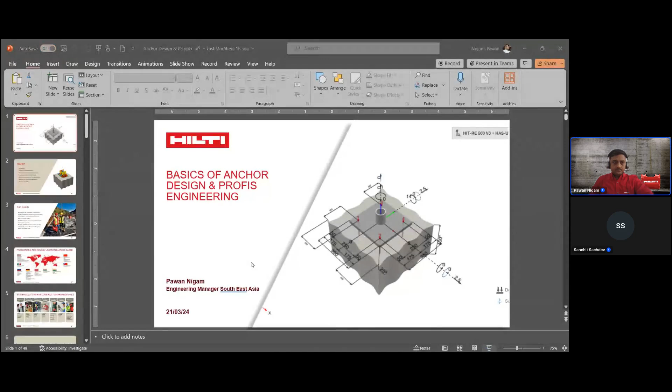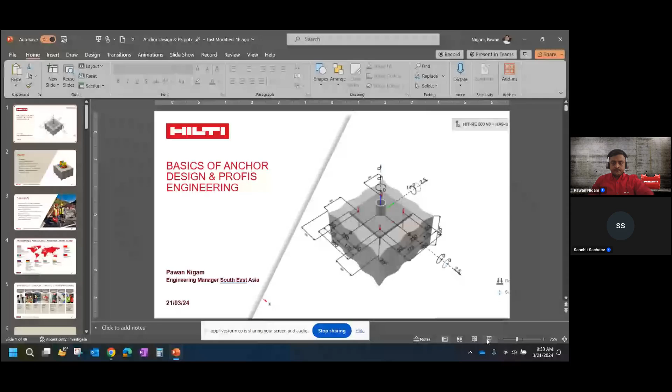There were some technical glitches with the screen sharing not showing in slideshow/presenter mode. After a few attempts to re-share the screen, it was resolved and confirmed working fine.

In today's webinar, we will cover a few basic aspects of anchoring application, how to select the right anchor, and the evaluation parameters for a post-installed anchor. We will talk about connection design using post-installed anchors, then move to the PROFIS Engineering page, showing how to gain software access with a small demonstration on selecting the right design guidelines. Finally, we will have a 10 minute question and answer slot at the end.

To begin with, let me introduce Hilti. We started in 1941 in a country known as the Principality of Liechtenstein, a very small country situated in Europe. Globally, we do almost 6 billion in sales with a global workforce of around 32,000 people. We are present in more than 120 countries, and it's a family-owned business.

In order to make sure that whatever R&D we do, we are able to give that benefit directly to customers. Talking about manufacturing locations, we are well spread across the globe, with different manufacturing facilities and R&D centers situated wherever we are present.

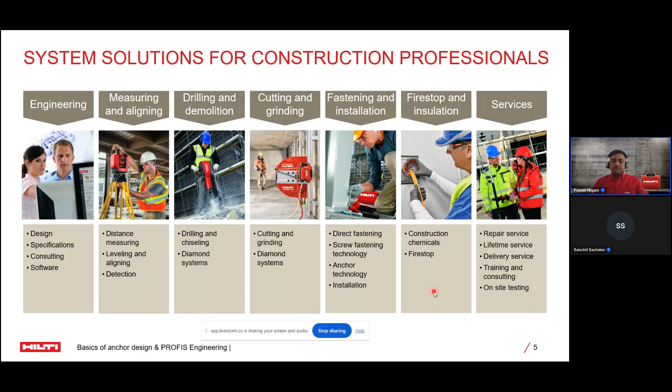We also have our strong footprint in passive fire protection systems. In today's world, it's very important to save buildings from fire hazards, so we have a portfolio which helps make the building properly compartmented, ensuring fire stays in the room of origin and does not spread from one room to another.

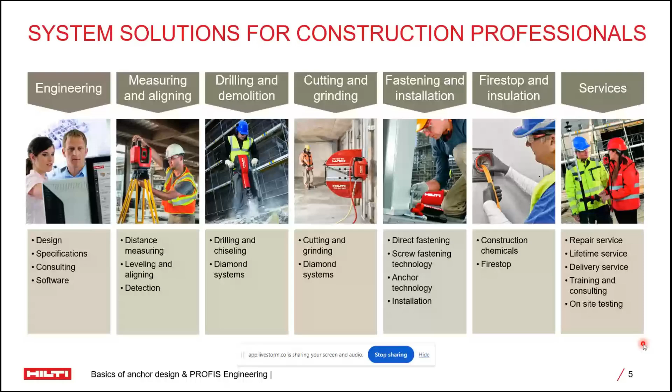Talking about the services, we provide repair services for all the tools we sell in the market. We give lifetime warranty on manufacturing defects, delivery services, and we also provide training and consultancy at the job site on how to use our product in an effective and most productive way.

With this, let's now jump to the topic of discussion today, which is steel to concrete connection. There are various methods through which you can fix steel base plates with existing concrete members, but today we will only focus on post-install mechanical anchors and post-install chemical anchors, because Hilti is widely known for these post-install anchors.

Talking about post-install anchors, the advantage of using this is it gives you flexibility in installing the anchors anywhere in the concrete surface based on the design need of a building. You don't have to worry about misplacement of bolts or the casting plate—it's very precise. The installation is also very fast; within an hour or so you can install your base plate and erect your structure.

If you are using a mechanical anchor, it is almost instant. The technology is also well established in the market, and we have a lot of references, approvals, and certificates to establish this particular technology in the market.

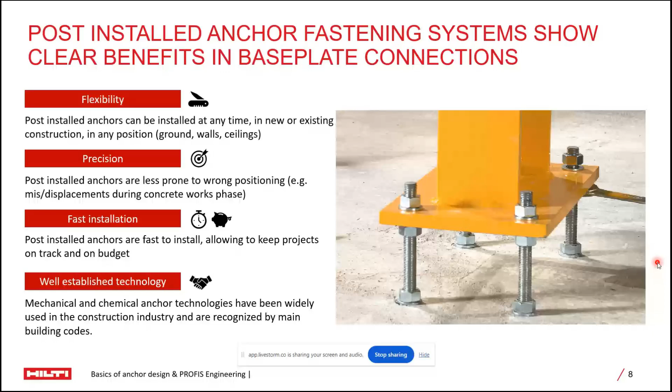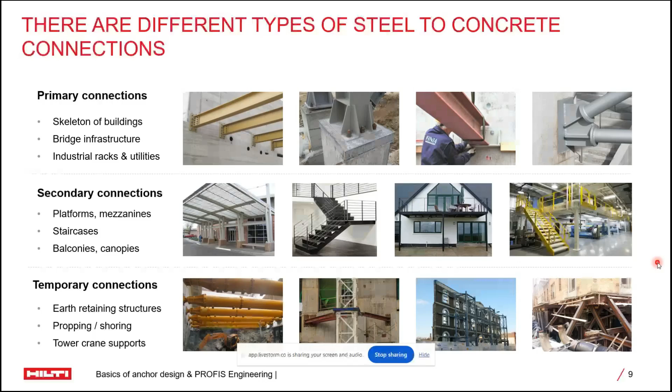Now, talking about the different connections which you can find at the job site, we can categorize into three buckets. I'm sorry for this. Okay, we can categorize into... Just hold on, Sanchit, let me mute this, otherwise it will keep on disturbing us.

Perfect, so make it long. Let me go back. Extremely sorry for this, I had to mute it, otherwise it will disturb us again and again. I hope the screen is visible again, Sanchit. It's good, yeah, it's visible.

It's visible, okay. So we can categorize these connections into three different types: primary, secondary, and temporary. Based on the criticality of the application, we segregate these connections based on design need. Primary connections are very critical because they take the entire structural load and transfer it to the concrete footing, D walls, or retaining walls. It's very important to design these connections because failure can lead to catastrophic effects on the safety of the structure and the people using that building.

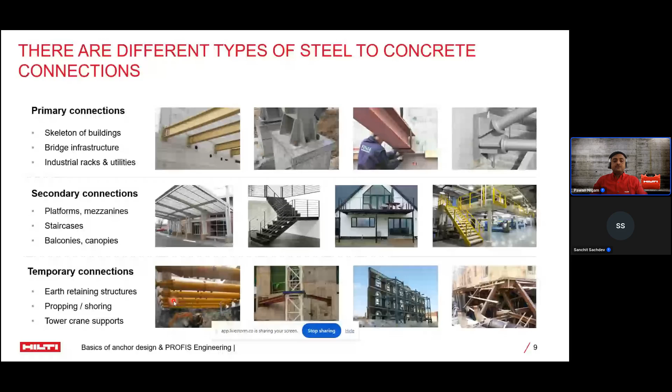So that's the reason—if you categorize all these connections, there are certain connections which are high on safety, and it is very important to design those, such as main steel beams, machine foundations, canopies, and non-structural elements like facade, stone cladding, or MEP supports hanged from the slab.

They are also not part of your main structure, but they are critical because if they fail, they can hamper the safety of the people occupying that particular building. So these are also very important to design.

Now when we talk about design, what are the steps involved in designing a post-install connection? The first step is the selection of the right product, meaning the product should have the qualification to be used as a post-installed anchor. The second step is design based on the guidelines available in the market, which take references from testing data.

The third step, which is also very critical, is the application or execution at the job site. Because if you select the right product and do the right design, but you are not installing the product in the right way, then all your efforts will go in vain.

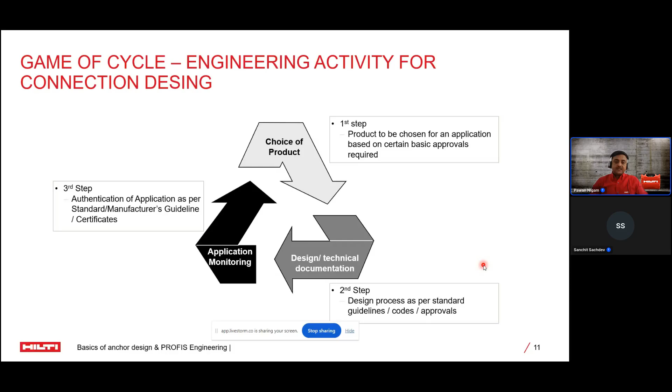So let's start with step one, and let's see why it is important for any product to qualify and get the qualification certification. This is also based on the design method you want to use. If you want to use European guidelines for designing the anchor, then EAD or European Assessment Document are the relevant documents for testing the product.

But on the other hand, if you are using ACI, then for testing the product, ACI 355.2 or 355.4 are the right testing criteria for the product.

So based on the nature of the product, the testing guidelines differ. For mechanical and chemical anchor, we have EAD 330499 - previously it used to be ETAG 001. And if you talk about American standard, we have ACI 355.2 and 355.4 for mechanical and chemical anchor respectively.

On the other hand, if you talk about rebar, then EAD 330087 is the qualifying criteria, and ICC AC 308 is the qualifying criteria if you talk about ACI standard.

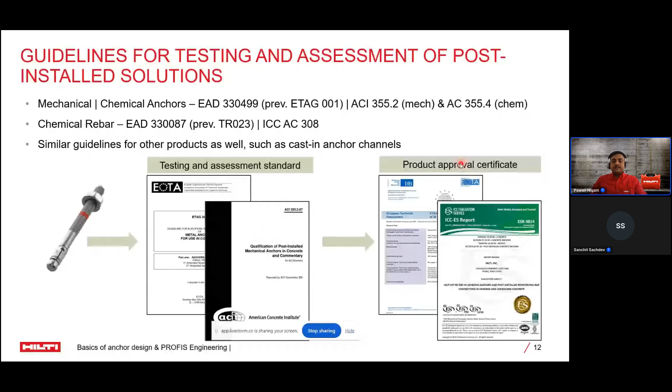Similar guidelines are also available for other cast-in products, but today we are not talking about cast-in, so we will not focus on that. So what happens is your product goes to testing based on these testing assessment standards, and then the product gets the approval to be used for post-install connection.

Now, why is testing important? The main reason is that for all products - mechanical anchor, chemical anchor - the bond strength or the friction capacity of the anchor cannot be calculated based on formulas. You need testing to find out the actual capacity of the anchor in the actual working environment.

For mechanical anchor, at how much embedment depth can this anchor give a certain load? What should be the expansion of the sleeve? This we cannot measure based on some scientific formula. We need to do the testing to find out the actual capacity and behavior of this anchor.

Similar things happen with chemical anchors. The bond strength, or bond stresses rather, which you want to find out, can only be determined by doing the testing and assessment on the product.

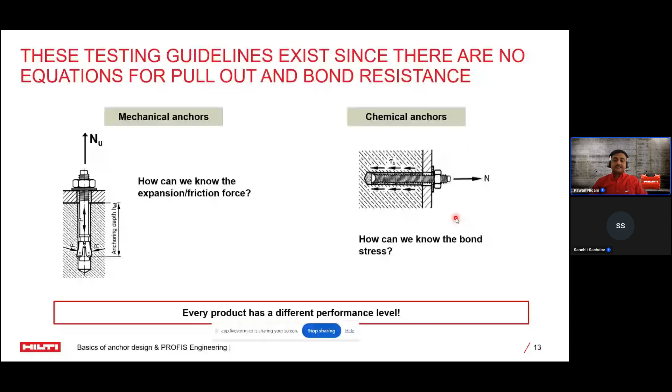Now, apart from these two, the assessment document also covers installation conditions, such as the spacing between two anchors, edge distance from the anchors, the thickness of the base material, grade of the base material, and the oldness and newness of the particular base material.

Apart from that, they also talk about installation. Let's say if you are using a new drill bit - what will happen? Because the new drill bit will give you a bigger borehole diameter, whereas the old drill bit will give you a smaller borehole diameter. So what will be the impact? That variable effect is also considered and tested in these test documents.

Similarly, for mechanical anchors, what will happen if you over-torque it? What will happen if you under-torque it? Then what will happen if the anchor is installed in an area where a crack is already there? These are the conditions these assessment documents talk about, and the testing is done based on these criteria. Apart from that, there are other criteria also, such as seismic, fatigue, and fire conditions that these documents also test.

Someone can say that I can do the pull-out test at the job site, and then I can see whether the product is qualifying or not. So my suggestion is, yes, you can do the pull-out test at the job site.

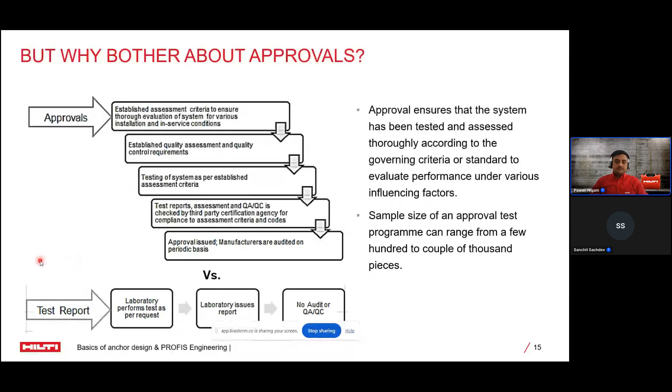Now apart from that, what other things are covered? As I said, it talks about the admissible service condition - the expected service condition of an anchor when it is subject to single anchor in tension or shear, or anchor group, and it talks about the minimum edge and spacing. It also talks about the suitability test, that means evaluation of the anchor in extreme conditions - for example, single anchor subjected to high strength concrete in a hammer drilled hole with minimum tolerance range.

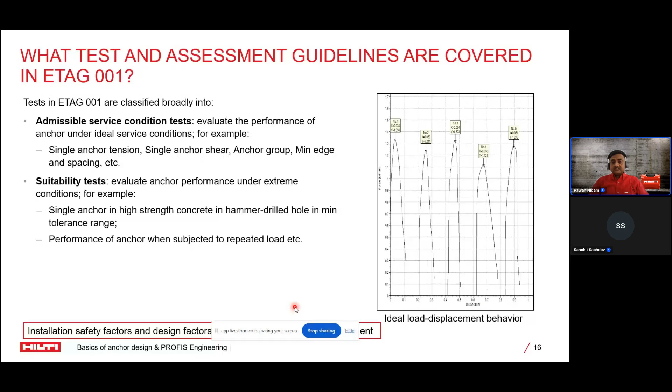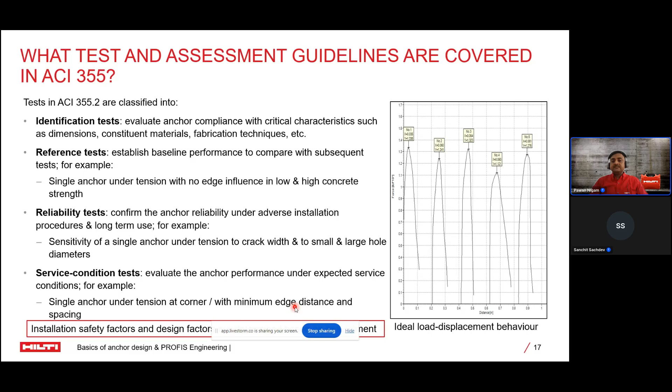For example, performance of anchor when subjected to repeated loads - those things we can only do in laboratories, that cannot be done at the job site. Similarly, if you talk about ACI, similar kinds of tests are done on ACI standards as well. They do the identification test, reference test, reliability and service condition test to give you the certificate for that particular product.

And then apart from that, there are certain other documents also which are many times very important when you talk about the entire service life of that particular connection. We are not designing the connection for let's say 1 day or 2 days - many times these connections last for 50 years and more than that. During that entire lifespan, the anchors are subjected to different environmental conditions like corrosion.

For certain projects, you might need LEED certification also - it should not have volatile content. Then the product should also be tested for long term aging. It should be tested for water tightness - in case of chemical anchor, it becomes very important that your product should not allow water seepage inside the concrete through the product itself, so that testing is also done. Then fire resistance, product certification, chemical resistance, electrical conductivity - all these tests are also needed for a product to get qualification to be used as a safe alternative to a cast-in anchor.

Now, why is design important? We are now moving to the second step of the complete process - when we talk about design. Imagine a situation where there is a connection to be done at the job site, and the engineer has just simply made this kind of sketch on the drawing, mentioning only 'anchor fastener'.

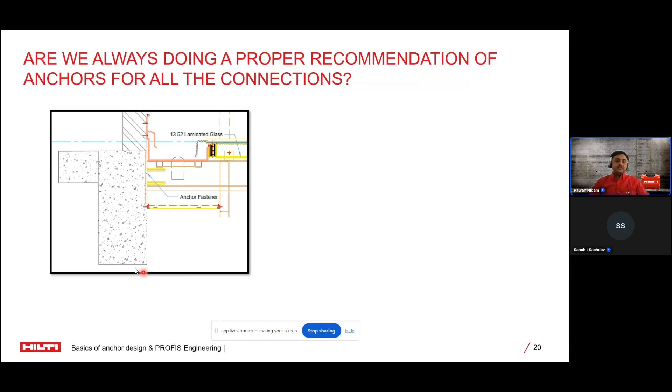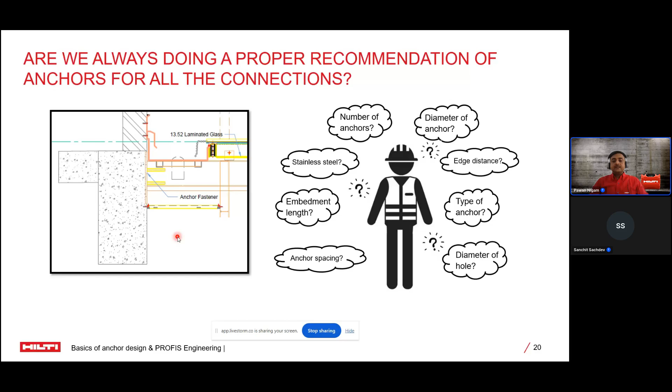What will happen if this kind of drawing goes to the job site? The labor or contractor working at the job site doesn't understand these things - they don't know what will be the number of anchors, the diameter, the edge distance, the grade of steel of the anchor, the embedment depth, whether they have to use chemical anchor or mechanical anchor, the spacing, the diameter of the drill hole. All these questions will be in the mind of the contractor, but there is no answer to it.

Why? Because in the drawing there is nothing mentioned - they have just mentioned 'anchor fastener'.

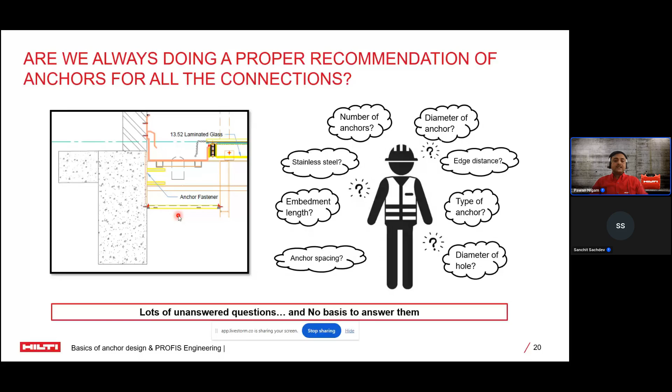From a designer's point of view, we have given the recommendation, but this recommendation is not useful for the contractor because there are so many questions which are unanswered. So what will happen if these kind of connections are left to the will of the contractor? These kind of connections will fail eventually. It might not fail in 3-4 years, 5 years, it might fail after 5 years also. And we have a lot of such examples where the connection has actually failed after 3-4 years or 5 years of the service of the anchor.

This is also a video where the connection is subjected to wind load, and at the time of designing we have not considered that thing. So what happened? Let me show you a video for that.

So you can see... yeah.

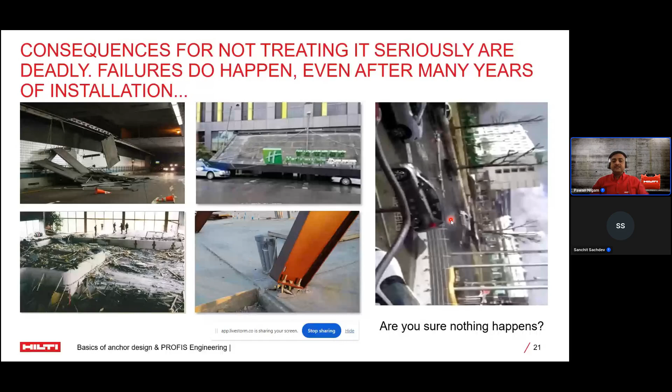I'm sorry to share this video. It might be disturbing for some of us, but then it was important to show the importance of these connections. That's why I have actually shown this video.

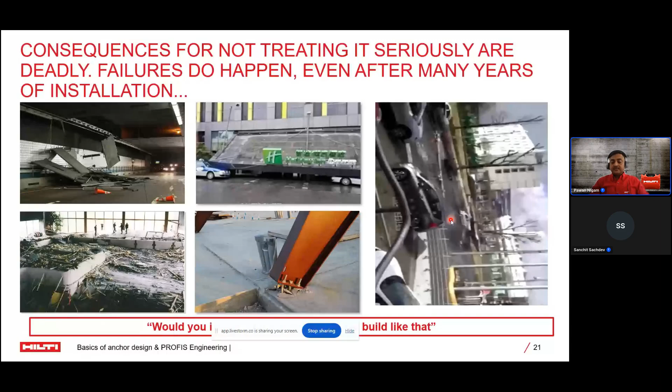So my question is then, would you like to live in these kind of buildings, or would you like to invest your money in these kind of projects where the connections are not designed as per the design guidelines? So my answer technically is no. So what are the current methods people normally use?

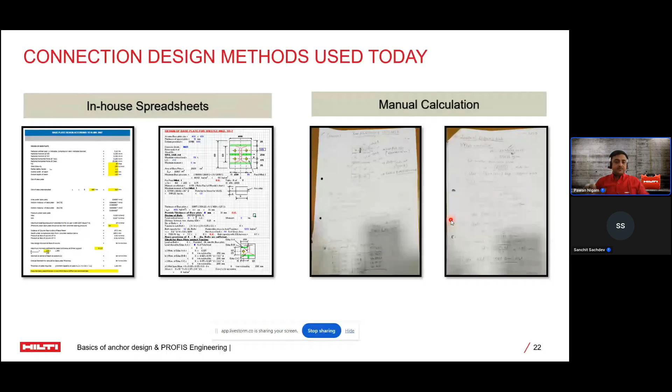In my experience, a lot of time I have seen that people are using these kind of Excel sheets or manual calculation to find out the diameter and the number of anchors. But what happens many times also is that people use thumb rules. Let's say, install 10D. If the plate thickness is 10 mm, let's install a 16 mm anchor. These kind of thumb rules are also many times people use.

But then what is the disadvantage of using these things? There is no consistency when you talk about these design methods, because in the same organization there are different engineers. If they are using manual calculation and they miss one small critical step, then the entire calculation might change. So it's not simple to design manually, and it's very time consuming. And if you have to get it cross-checked with your peer consultant, then also it's very unreliable.

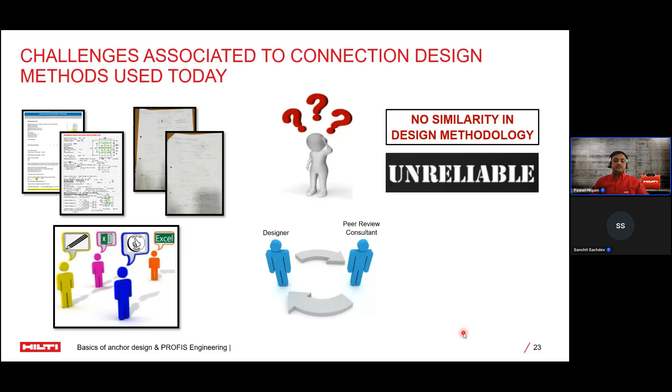Many a times the anchors are underutilized, or it can be overutilized also sometimes. Then we have to do the rework if there is a design change, and it becomes very time consuming to do the rework on these kind of cases.

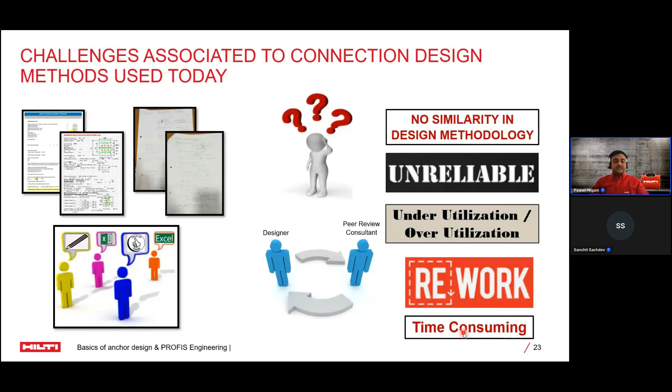So how can we ensure that the connection which we have designed is safe, and we can also easily verify that? How can we do that? So before going to the actual software, let me also tell you what all are the conditions which we need to keep in mind while selecting a product and while designing that connection.

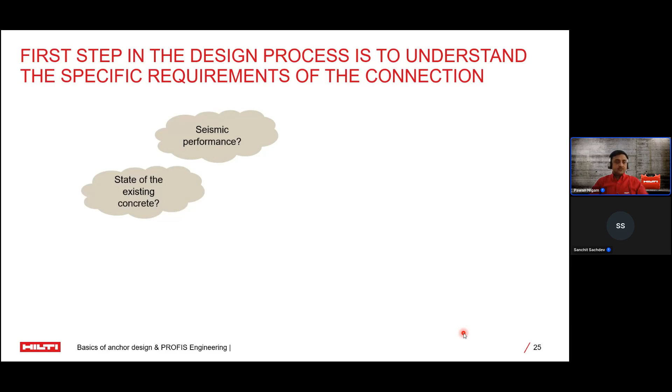So first of all, we need to see whether the connection needs a seismic performance, whether what is the state of the existing concrete - is it old concrete, new concrete, or what is the grade of the existing concrete? Do we need corrosion protection? What is the service life requirement of that connection - is it 10 years, 20 years, 50 years, or let's say in some cases in infra projects normally it is more than 100 years also.

And also, do we need fire rating? In today's environment, fire is also very unpredictable. And we have seen many instances where fire has occurred and the connection has also failed because the anchors which we have used are not tested for fire. The main structure we design with all the care, but when you talk about these secondary connections or the steel connection, there we sometimes unknowingly ignore these facts.

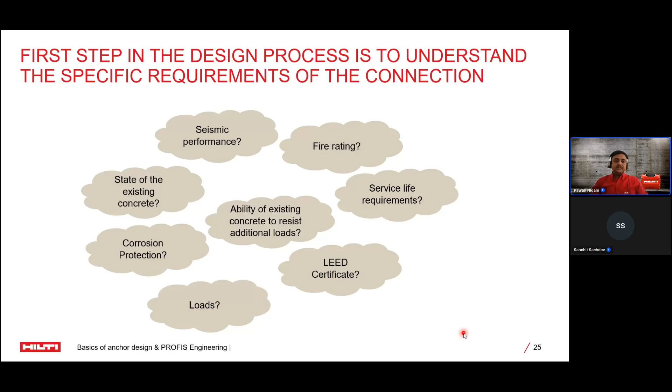Then LEED certification might be also useful for some of the building, because again, in today's scenario people are moving towards green building. And then we also talk about the loads - whether it is subjected to tension, shear, bending moment, or torsion, what kind of loads are coming. And we also need to know whether the existing concrete on which we are fixing these anchors is actually able to take the load or not.

After determining all these conditions, then we have to select the right design guidelines. So in some countries people follow European standard, some countries people follow ACI, and in many countries they have their own standards also. So it's very important to select the right design standard before actually going to the design of the product itself. And apart from that, we also have some international guidelines which talk about dynamic loading, seismic, fatigue, and shock.

So these are the guidelines available for designing the connections in those conditions. When we design the anchor, there are certain things we can get as an output from the design. First is the type of anchor, whether we need chemical or mechanical, what is the diameter of the anchor, what is the embedment depth, how many anchors we need, and the layout of the anchor. Apart from that, we can also check for fire and corrosion.

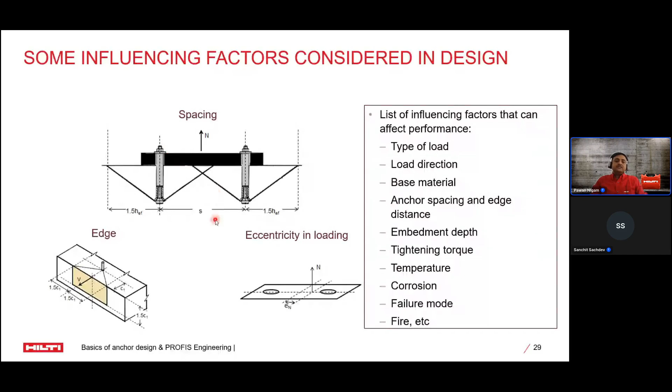Now there are certain factors which influence the overall capacity of the particular connection. To name a few, spacing is one of the biggest criteria, then edge distance, the grade of the concrete - these are the main criteria that influence the overall capacity of the connection largely. Apart from that, obviously torquing of the anchor, temperature, corrosion, failure - all these are also conditions which affect overall performance. So we need to consider these things while designing.

So when we design the anchor, we actually break down the entire connection into two. We resolve the forces into tension and shear. Then for tension we check the steel, we check concrete for three types of failure, and we find out the least design resistance. We do a similar thing for shear, and then we check whether this connection, if both tension and shear are acting together, what will happen to that connection. So we do the check for combination as well.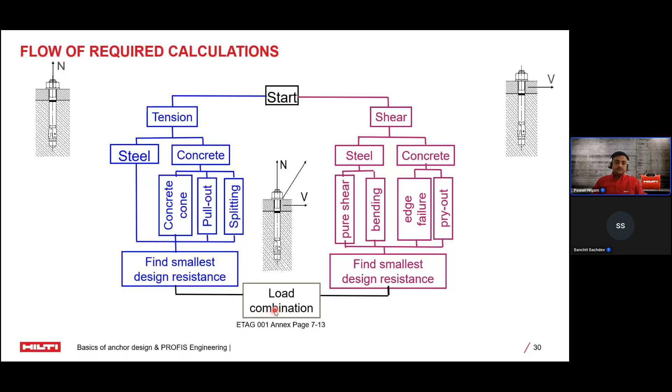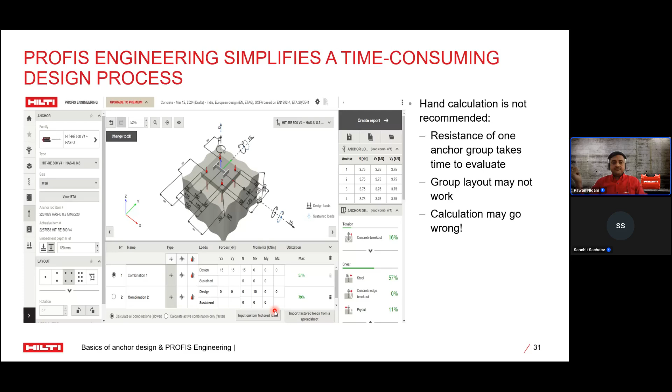So all these conditions, if you go and do the hand calculation, it's very time consuming, and many a times it can lead to errors also, because if you miss one small safety factor, the entire design will get impacted because of that.

So with this, let me now take you to PROFIS Engineering. Before I go there, let me also show you how to gain access to the software.

So this is the web page address. I request you not to Google it, just put this in the browser, which is profisengineering.hilti.com. The moment you plug it in, this kind of web page will get displayed on your screen. You click on register now. A small screen will pop up asking for your working email ID. You can create any password of your choice - whatever password you want to keep, you can keep it.

Then in the country of residence, I'll request you to select Myanmar, because if you are joining from, let's say, Myanmar or Cambodia, this is required to be Myanmar only, since we have not launched the software as of now in Cambodia. So if you select Cambodia, you might not get access to the software. For people joining from Maldives and Brunei - for Maldives, you can select Sri Lanka as your nearest country, and for Brunei, again, you have to use Myanmar to gain access. If you select any other country, you might not get access to PROFIS Engineering. So my humble request, while registering, please make sure of it.

Then once you are done with that, there is an email which will go to your working email address with a 6-digit one-time password. You put in that one-time password, and then you are good to go. The page will redirect you to this particular page where you can access all these things. Now let me take you to the PROFIS Engineering web page.

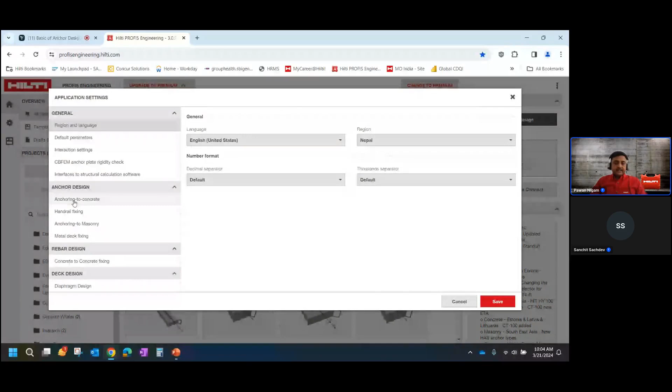Now, before you go into that, if you want to change the design guideline, right now you can see by default it is EN. If you want to change the design guidelines, just go to settings, and there you have to find this anchoring to concrete section. Over here, you can select the design guidelines which you want to use. By default, there are certain guidelines which are placed in the software.

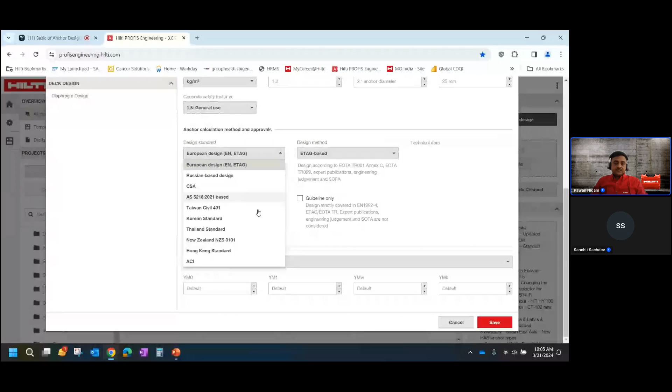So you have ACI, and apart from ACI, we have some other local guidelines which some countries follow - we have Russian, Thai, New Zealand, Hong Kong. If your project happens to be in any of these countries, you can select these standards as well. Once you are done with that, you just click on save, and we are good to go.

So you just click on anchoring to concrete, and this is the template which you will see by default. The first step is to define the boundary condition of the concrete.

That means you have to define what is the surface on which you are mounting this base plate - is it a beam, column, slab? For example, let me consider a base plate on top of a slab. If I have to mount that, and the connection is actually in the center of the slab, so I have enough edge distance around it.

So what I can do is go on this corner - you can see this red color indication. You do the double click, and the concrete will become infinite on all four edges. If you have to go back, you again go here and double click, and you will get the edges again. And then from here you can define the edge distance as well.

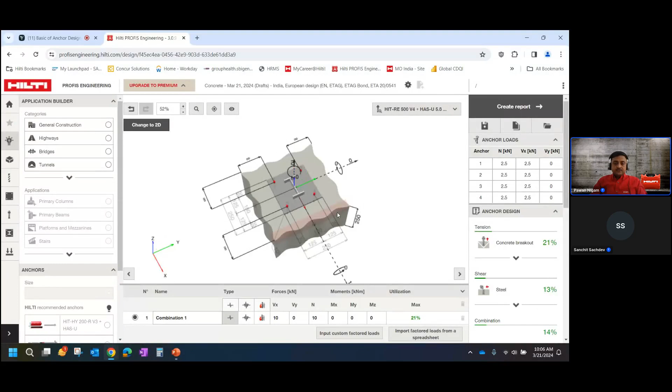Once you are done with that, then you can define the thickness. Let's say my slab is 200 mm thick, so I'll put 200.

Then the next step is to define the loads - how much load are acting on the base plate. Let's say I have 10 kilonewton tension, 10 kilonewton shear in x direction, and similarly I have in y direction also. There are two ways to put the loads.

First, you can click directly over here and put it. Second, you can put the loads from this tab down below. And if you have multiple load combinations, then also you can add that combination.

Let's say I input a custom load - another tab will open. Let's say in this case I have 10 kilonewton bending moment, so I'll put 10 kilonewton. I'll select add. Right, so you see now there are two load combinations which the software will calculate.

Similarly, if you have more than two, you can actually add those combinations manually from here, or you can add all the load combinations from the spreadsheet. You can copy it and paste it over here.

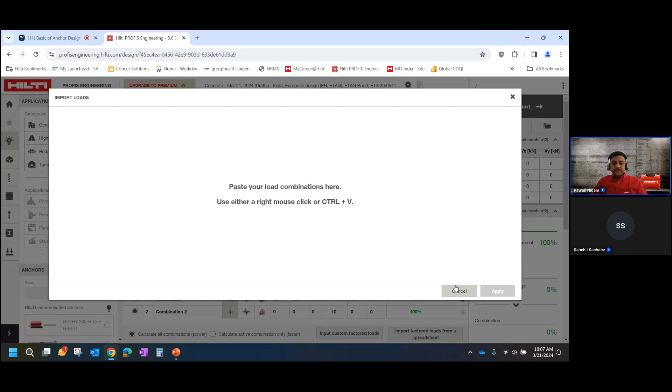So all the combinations will get automatically embedded in the software, and the software will check for all the load combinations, and it will give you the result for the decisive combination. Let's say in combination 1 it is only getting utilized 18%, but in combination 2 the connection is getting utilized by 100%. That is how you will get the result.

The next step is you have to define the grade of the concrete also. On the left hand side there is a tab for base material. You go on base material, select whether the concrete is cracked or uncracked, and then here you can define the grade of the existing concrete.

Now for example, you have customized the grade at your job site and you don't find it pre-fitted here, then you just select custom. These two tabs will open up for you.

If you want to put the cylindrical strength, you can put cylindrical strength. If you want to put cubical, you can put cubical as well. Apart from that, you can also put the short-term and long-term temperature range through which you think the connection can be subjected. Based on that, the product selection will happen automatically.

Then from this area also, you can define the thickness, edges, or everything from here as well. So there are two ways. First is directly from the screen, second is from this tab.

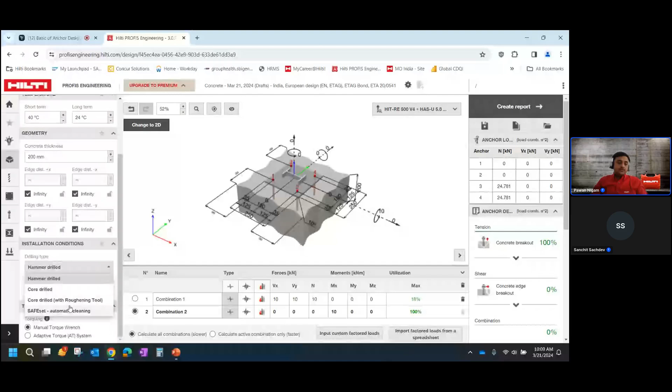Apart from that, you can also define the installation condition, whether you are drilling hammer with the hammer drill bit, or you are drilling a core drilled hole, or you are drilling core drilling with roughening, or you are drilling a SafeSet. So the drilling method you define here.

Then you define the hole type, whether it is dry, water saturated, water filled, or submerged. Based on that, the product will automatically change again.

Then in case of mechanical anchor, there are torquing methods also available. If you are doing manual torquing, you can select this. If you are using Hilti's automatic torquing tool, then you can select Adaptive Torque System from this particular tab.

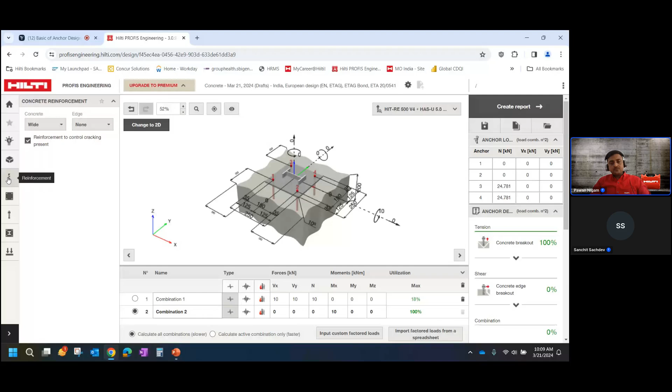Once you are done with this, then the second tab is the reinforcement. Here, if you want to put the reinforcement also, which you should, you can go to this tab and you can put the reinforcement layout also.

But for that, you need to change the design guidelines. So for doing that, you just go to this load section. Here, by default, it is ETAG based. From here, you can select EN1992 Part 4, which is the latest guideline, which gives us the flexibility to utilize the existing reinforcement also.

You select this, again go back to here, and from here you can define the diameter and the spacing and all those things in the existing concrete member. Let's say it is 10 mm, 12 mm, what is the strength of steel you have used, what is the spacing, and how much the rebar is utilized currently. So bottom layer, top layer, everything you can define from here.

Let me go back for simplicity. Let me not use this.

Apart from that, then you can go to the anchor plate. If you want to change the dimension of the base plate, then you can go in this section. You have by default rectangle plate, circular, diamond shape, all these are by default located here. But if you want the base plate to be of your own choice, then you can go here.

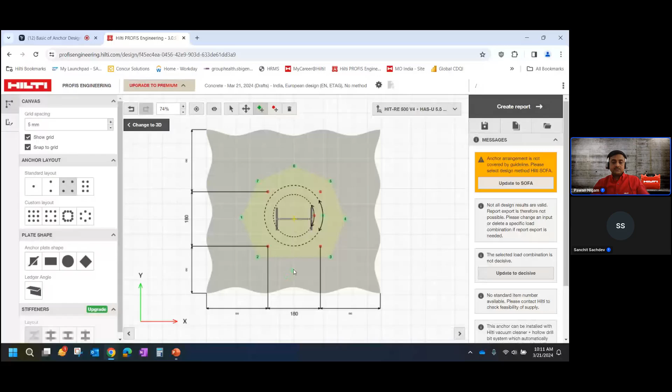You just simply click on add node, and wherever you want to put a node, you can just simply put the nodes. Let's say I want to put it in a hexagonal shape. So this is how you can change the orientation of the base plate as well.

And if you want to go back, you just have to select this undo button, and the plate will go back to the original shape.

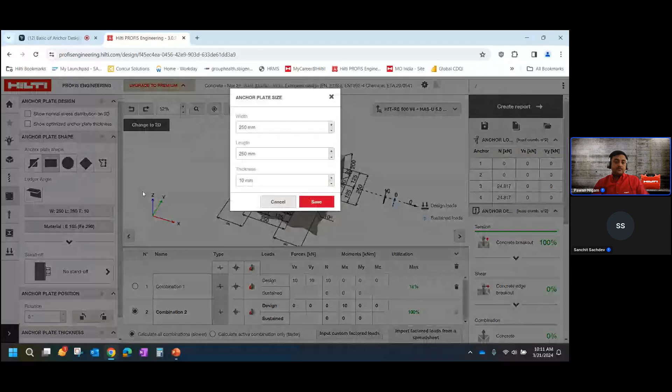From here, you can also define the dimension, length, breadth, and thickness of the base plate, and you can define it directly on the display as well. Let's say I want to keep it 200 by 200, so I'll simply put 200 by 200 here. And then anchor spacing also you can define directly from here, say 150 by 150.

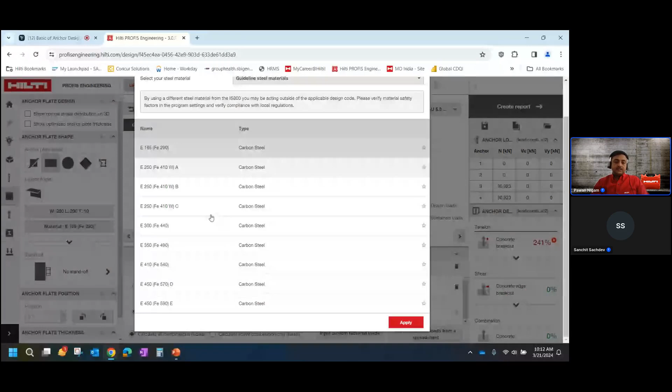And then material also, if you want to define the material of the base plate, you can go to this section. There are pre-treated values, and if you want to customize it, just go to custom. All these sections will open up for you. You put the values based on the material which you are using, and just click on apply.

Apart from that, in certain cases, you might also need to create a standoff between the base plate and the concrete member. So what you can do is you can just click on this. There are pre-fed standoff combinations from which you can select.

Let's say you are using a combination with grout. So you just select this, and from here you can define the thickness of the grouting material, and you can also define the compressive strength of the grouting material.

So let me go back. Then this is the section from where you can select the anchor.

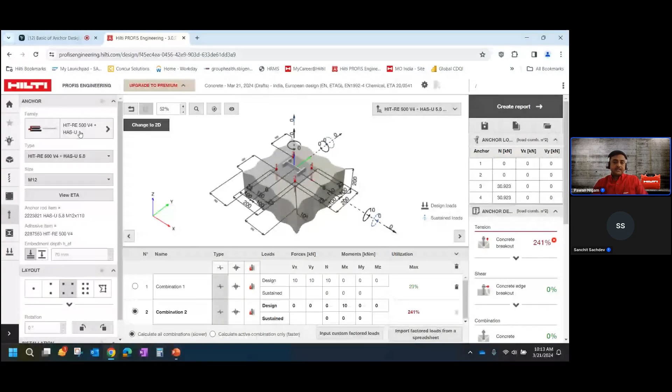By default it is selecting the chemical anchor, but if you want to select the mechanical anchor, you go to this section, and from here you can see which anchors are already available in the portfolio. Let's say we have HST3 mechanical anchor, I'll select this. After that, you can define the profile also on the base plate.

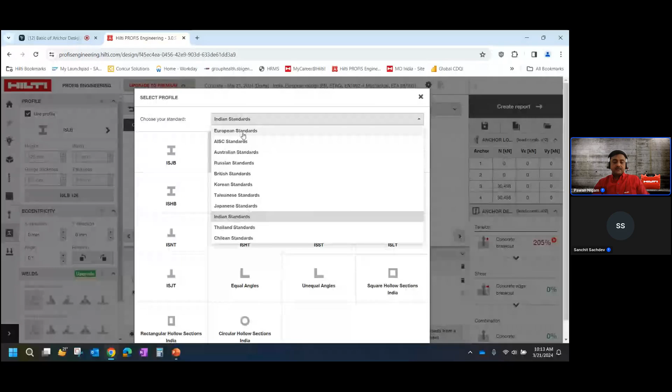This is the section where you can see the default profile, and if you want to change the design guideline of the profile, you can select anything from here. Let's say European, and I have rectangle hollow section. The profile will change like this, and from here you can change the dimension. Let's say 76, then the profile size will automatically change. And if I have my own custom profile, I'll go back, select custom, and this section will open up so I can put whatever value I want.

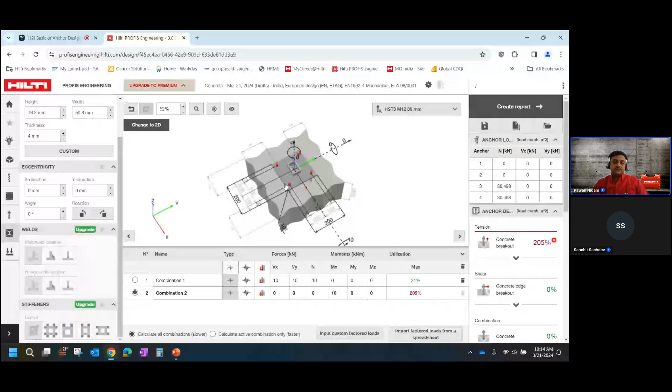This is the section from where you can define the eccentricity of the profile, which is also very important when designing a connection, because if your profile is not at the center of the base plate and is towards the edge, the load distribution on the anchor will change significantly. So it's very important to place the profile exactly where you want it to be, so that the distribution of forces can also be calculated in a similar fashion.

Then the last tab is the load tab, where you can select whether you want to design the connection for static, seismic, fatigue, or fire. These are the things you can select from here, and then you can do the design calculation. This is the tab where you can do the base plate rigidity check also.

So there are three things. By default, the software considers that your base plate is rigid. The second option is to check the rigidity of the base plate—the software can give you an overall idea whether the base plate you've selected is sufficient enough to transfer the load safely or not. The third option is CBFEM, which is not available as of now in our part of the world. Once it is active, I can come back again and explain it to you.

Once you are done with this, on the right hand side you can see the design optimization of your anchor. This particular connection is getting utilized by 205% in concrete breakout and pullout, which means your connection will fail. That's how you can define it.

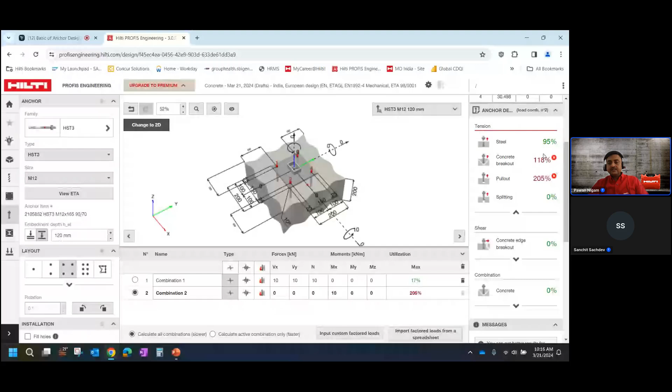So what you can do is, since concrete breakout is happening, there are two things we can do: either increase the spacing or increase the embedment depth. Let's go back here—let me check whether I can increase the embedment depth. I can go maximum up to 120 mm, but there is still concrete breakout failure happening. So what I can do is increase the spacing a little bit. Let's say I'll go back to 200, and this was 180.

Similarly, I can go back here to 250, and this also 180. My design is still not qualifying. So what I can do is try to increase the diameter. Let's say 16—also it is not passing.

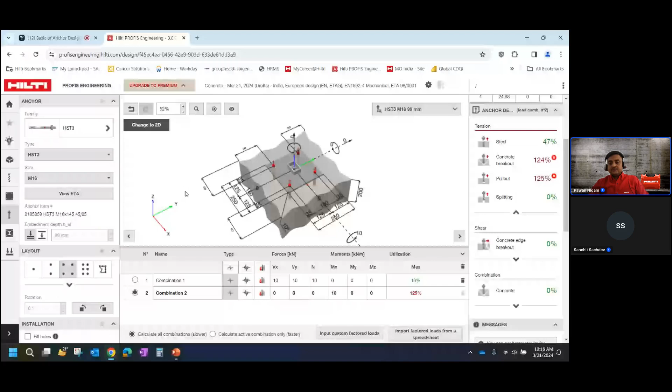So let me check whether this design gets qualified with a chemical anchor instead. I'll go back and select 16 mm. Yes, my anchor design is getting qualified now, and I am getting 100% utilization in concrete breakout.

Let me see if I can optimize it further. So let me select 12 mm—yes, I can still optimize it. Now my steel of the anchor is getting utilized by almost 89%, and the concrete breakout is at 100%. That's how you can optimize the overall design, and you can see the decisive factor is the bending moment. The normal tension shear is only getting utilized by 18%, but the decisive combination for us is the bending moment which is active.

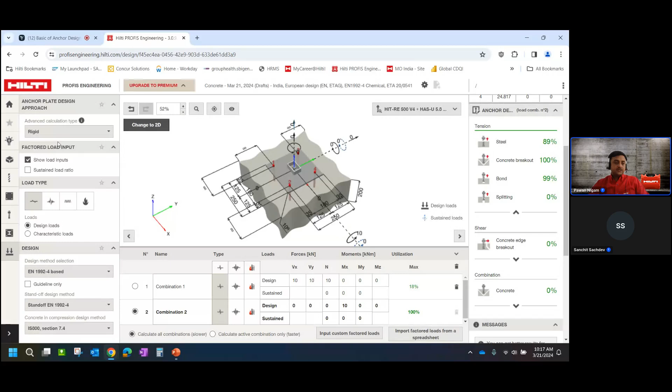Now let me also show you the base plate check. The moment you select this, you will get a calculate tab option. I'll select this, and the software will do some iteration to check whether the base plate is rigid enough or not.

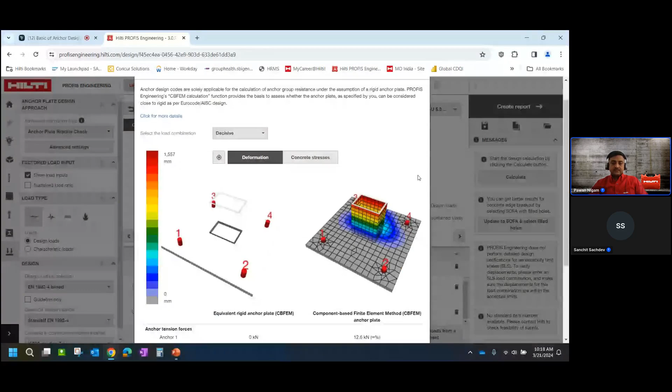Once the analysis is done, this is how you can get the result. By default, the load distribution and stresses should be like that if the plate is rigid enough, but in our case, this is how the load distribution and deflection is happening.

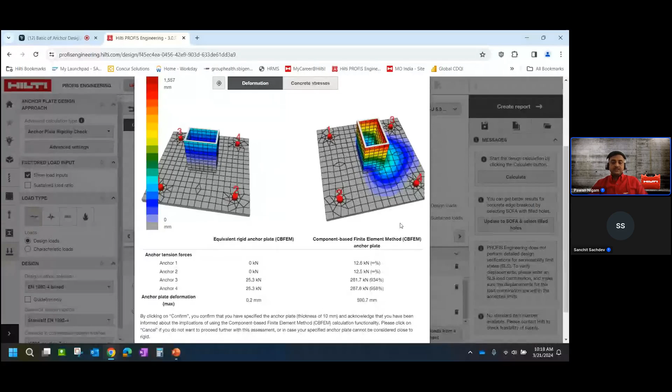You see, in our case, if I'm using a 10 mm plate, the deflection is almost 590 mm. In an ideal case, it should be 0.2 mm. That means my connection will eventually fail if I use this thickness of base plate. So this gives you a tentative idea whether the base plate you selected is rigid enough or not, and based on that you can change the dimensions.

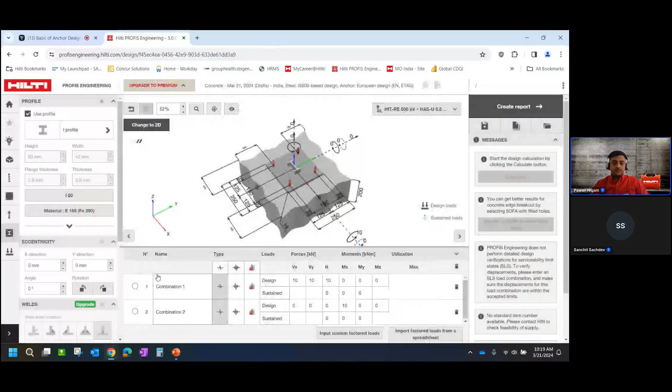Let's say I try 16 mm over here, and let me go back to my original profile. Let me select ISMB, and the size is, let's say, 200, and then I'll click on select.

Now you can see the rigidity ideally was 0.2, now I can get up to 0.7 mm. If I'm satisfied with this deflection, I'll simply click on confirm. If there's any error, the software will give you the error and you can click OK.

So earlier, if I was not checking the rigidity of the base plate, my anchor utilization was almost 89% in steel and 100% in concrete breakout. But in the new case, when I'm also checking the rigidity, you can see this connection is failing. So this is the impact of the base plate on the overall design of the anchor. While designing the anchor, it's very important to check the rigidity of the base plate, so that the plate doesn't fail and doesn't give uneven stresses on the anchors.

Let me go back to the original thing. Now if you're okay with this design, the next step is to create the report. You just click on report, and if you want to put any comments you can put them over here. If you want to define the connection type, you can define that. If you want to put anything in the notes, you can put that, and then click save and generate.

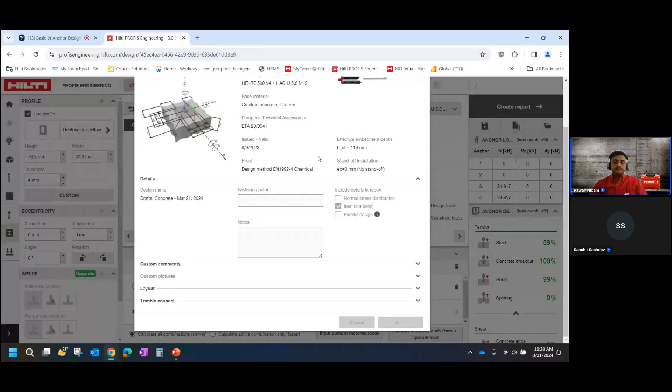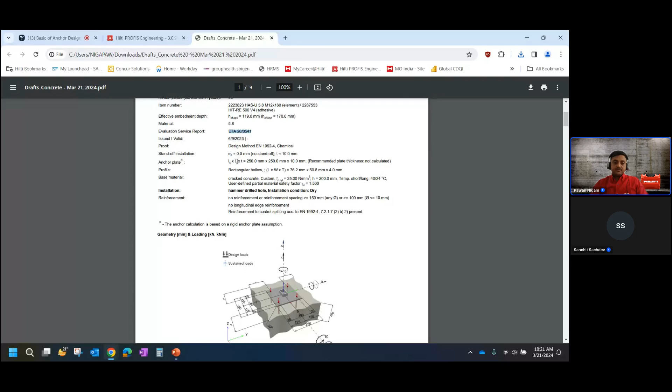Once you're done with this, there's an almost 9 page report which you will see. The first page talks about the product you used, the picture of that, item number, the embedment depth, the ETA certification number based on which the product is qualified for this particular connection, the design method used, dimension of the base plate, and then you get the orientation. From page 2 onwards, you get the detailed calculation.

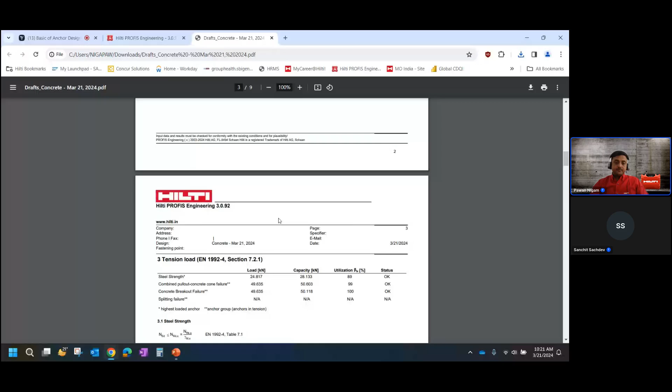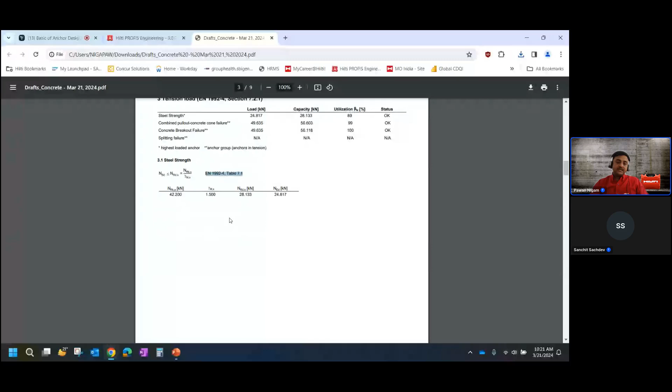Combination 2 was our decisive combination, that's why it's highlighted in this color. From page 3 onwards, you get the detailed calculation of all the parameters I've shown you in the software, the steel strength, pull out, breakout, splitting, and you get the reference number also. So if you want to check and go back in the design guideline, you can easily refer to the equation and check whether the software has done the right calculation or not. Everywhere, for all the formulas, you get the equation number too.

Once you're satisfied with this, you can go ahead with the connection design. The next step is you can also export this PE file. Let's say if you want to send it to the peer reviewer, you just click on this file. The .pe file will get generated, and that file you can send to your colleague or peer reviewer, and he can simply drag and drop it in his login and see what designs you have done.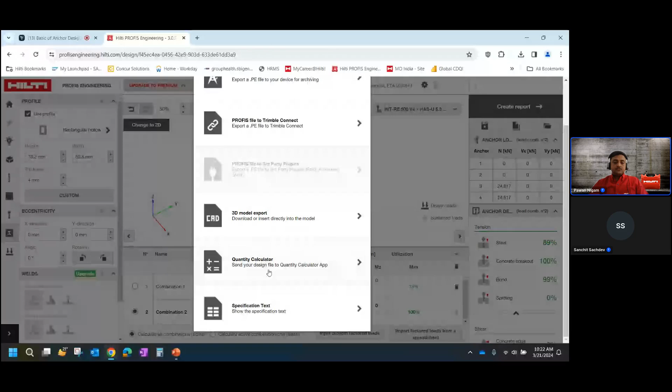Then you can export the 3D model of your anchors. You can also do the quantity calculation in the software, and you can also develop the specification text for the design you've done. Apart from that, there are certain other things also.

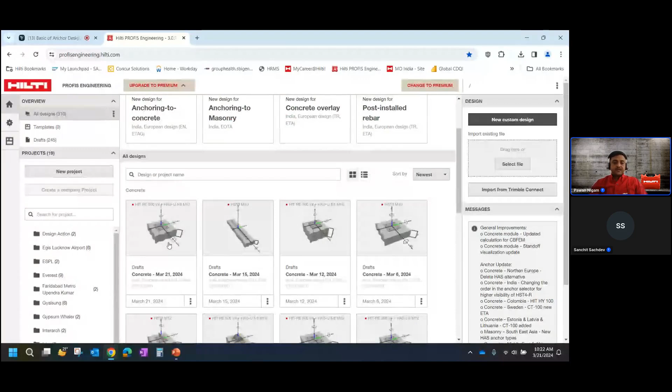Since this software is completely cloud-based, you don't have to worry about saving the design files every time on your desktop. By default, it will get saved automatically on the folder which you have selected.

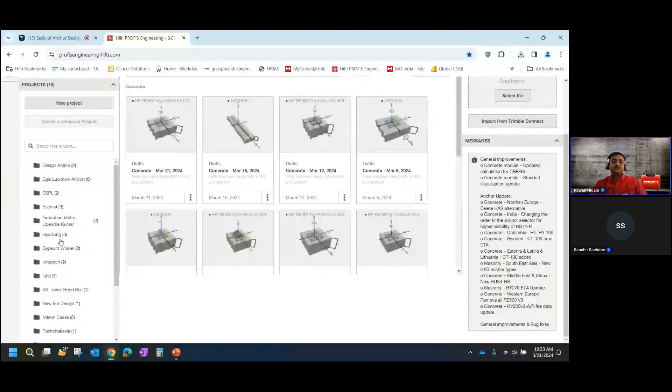Let's say I want to create a new folder for the project. You just click new, and these kinds of projects you can create in your login ID, which will stay there till the time you want it. You can simply drag and drop these design reports in the specific project folder. That's how you can organize these files, so whenever you need it, you can easily get it.

This is about the software. Let me go back to the slides, and then we can take the question answers also.

So once you are done with the designing, the next step is the installation. Now in installation, the first step is to identify the safe drilling areas.

If you don't identify that, then instead of drilling, let's say, 10 holes, you end up drilling 20 holes like this. So the easiest thing which you can do is to use a scanner.

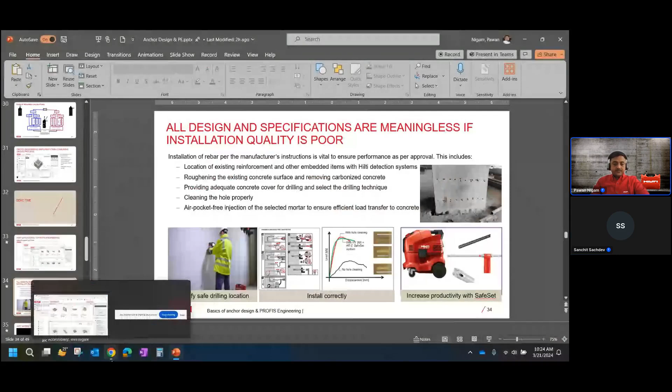Sanchit, please let me know if the audio is there. No, the audio isn't. Okay, let me again share my screen. It should come now. Yeah, it's audible now. Thank you.

So with this tool, you can identify the safe drilling location in the concrete, and then you can start with drilling the hole. Now, while drilling the hole, if you are installing a chemical anchor, or for that matter, a mechanical anchor, cleaning of the hole is also very important.

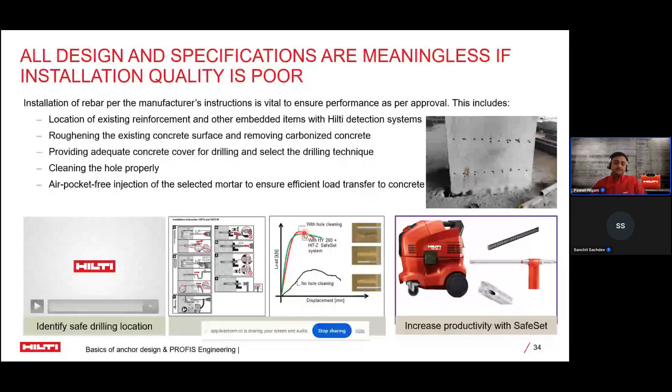Right, let me show you a small video for that as well.

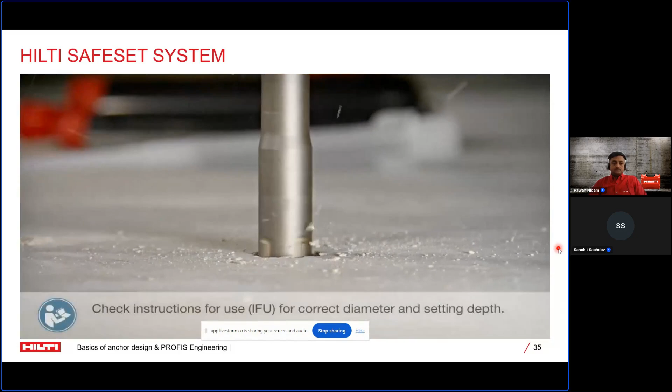Yeah, this is how you can use this SafeSet technology. You can save the unproductive labor in cleaning the hole, and at the same time you stay safe, and have peace of mind that the hole is cleaned properly and the load will be as per the design which you have done.

Apart from that, we can also provide you engineering service, like we have dedicated field engineers in all our lead markets. It might not be there in Brunei and Maldives, but we will have in Myanmar and Cambodia. So then the software is available at your disposal, which you can use at any given point of time.

We can customize the webinar based on your demand, and we can do the site demonstration to show the labor how to install the product.

We can give you the pull-out test for checking the workmanship. Again, I'm repeating this: it is for checking the workmanship, it is not for testing the product. Then we can also help you in creating the technical submittals if you want to quote for any project of yours.

Apart from that, I just wanted to introduce one website which is askhilti.sg. This is a platform which we have created where we keep on posting a lot of technical content, and we also keep doing live webinars on this platform.

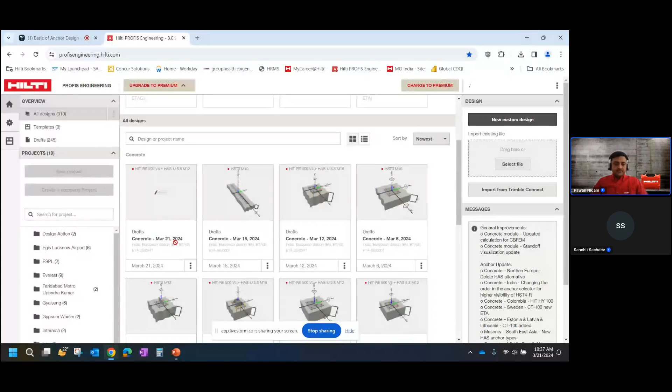Can we make a PDF file of design calculations in the PROFIS design website? Yes, I've shown this before, but let me share it again. The whole purpose of the software is to get the complete design output. Let me open this file again. Once you're satisfied and your calculation is within range, you just click on 'create report' and generate the PDF from there. This is how the PDF design calculation looks like - it's almost a 9-page report you will get from the software.

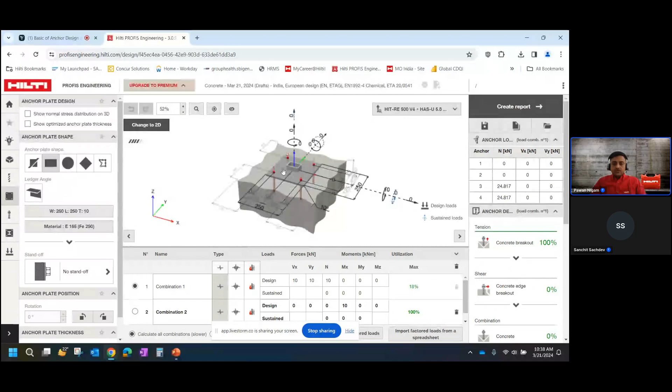Since I have the software open, let me share the standoff case. From this plate section, you can access the standoff case. In the normal condition, let me select this particular load combination - you can see my anchor is getting utilized by 10%. Now if I apply the standoff in the same case, the utilization goes up to 152% in shear. Let me go back and show you again.

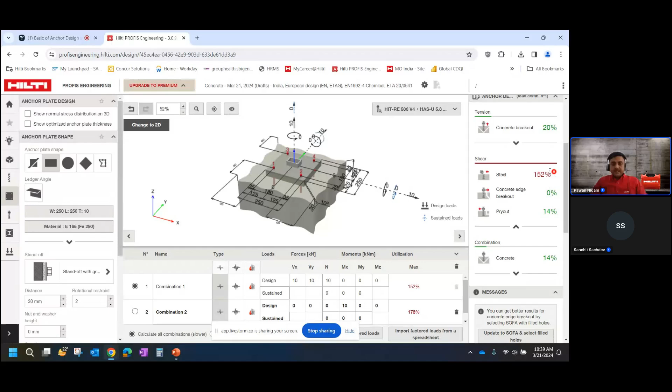In shear, earlier it was only 18% - my steel was getting utilized by only 18%. But the moment I apply the standoff, the same steel is now getting utilized by 152%. This happens because of the lever arm created between the plate and the concrete, and since the lever arm gives shear force on the rod, the strength of the rod is reduced to 50% in case of shear. That's why the utilization percentage suddenly increases.

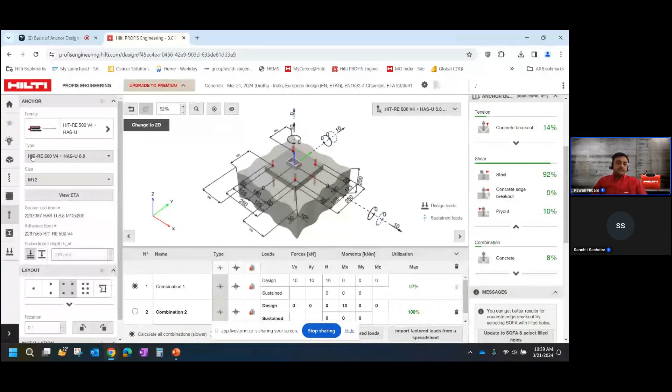For these cases, you only have one of two options: either increase the grade of the rod, which you can do easily from here - by default it is 5.8, you can select 8.8 - and decrease the utilization, or the second option is to increase the diameter. These are the two options you can select for these lever arm cases.

Okay. So we do have more questions. Do we need to take them, or shall we ask them to submit separately?